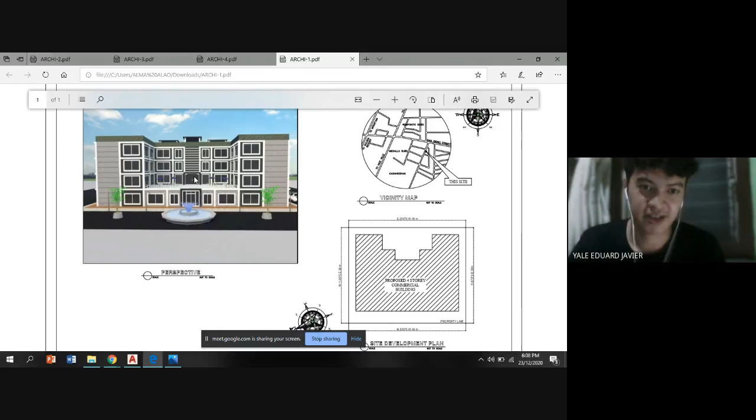This project is a four-story commercial building. First, this is our perspective, vicinity map, and site development plan. As you can see, it is a nice and big building because it has a 1,200 square meter floor area and a 1,780 square meter lot area.

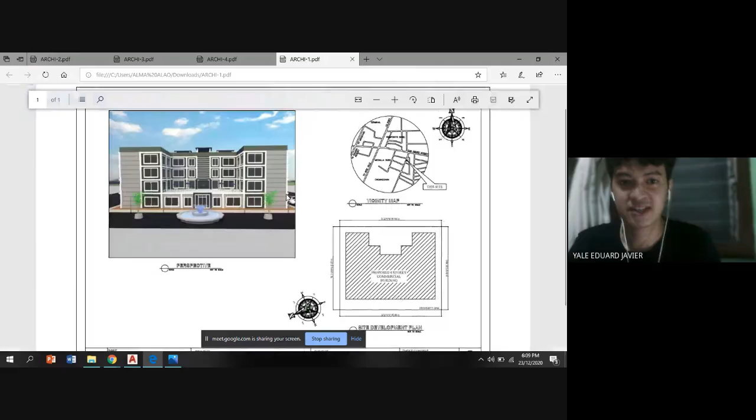This commercial building is located at Kangagohan, Hanabo City. As you can see in our lot area, we used an app like Google Map to locate our location. Using Google Map, we found an empty space, an area where we could establish a four-story commercial building.

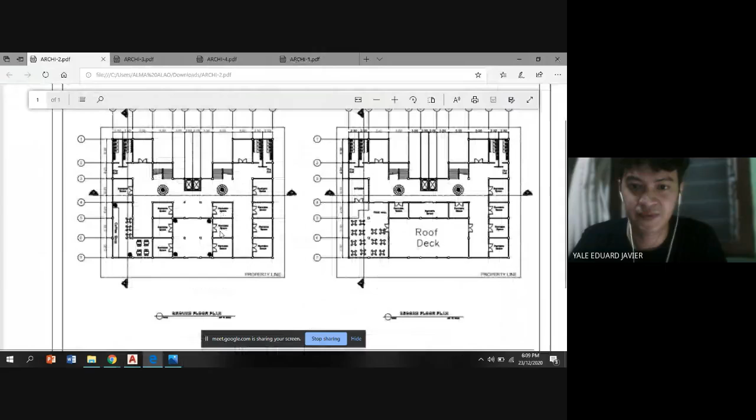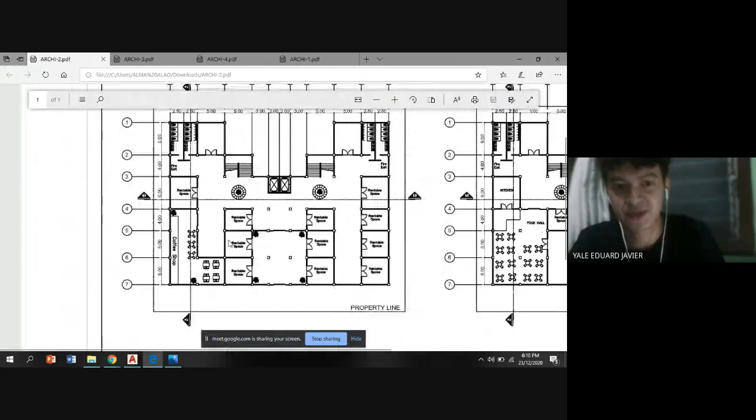Next I will show you our floor plan. These are the ground floor plan and second floor plan. As you can see in our ground floor plan, it consists of four bathrooms, four CRs, and two stairs at both corners and a fire exit. It has some rentable space, and also a coffee shop at the side for people to chill after work at the office.

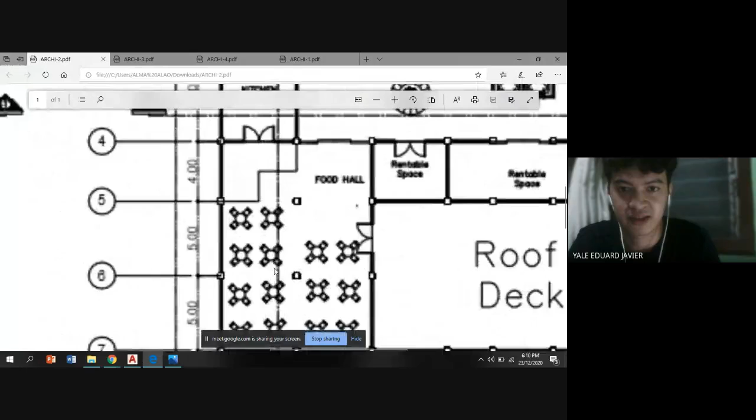Next, the second floor plan is also the same as the ground floor plan. The dimensions are also the same, but the difference is it has a roof deck on the second floor, and a food hall at the side.

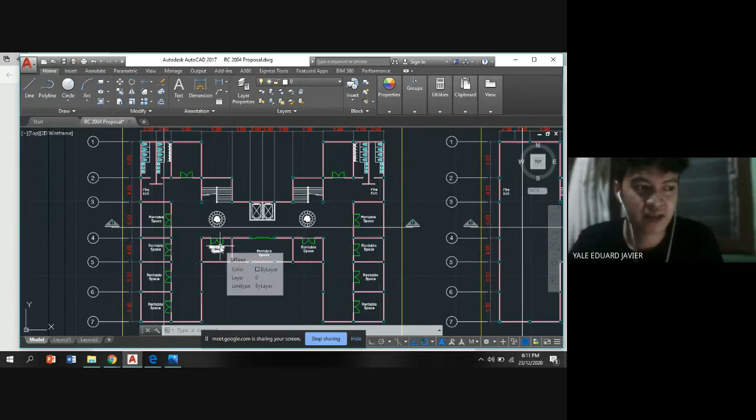Next, I will show you the third and fourth floor plan. This is our floor plan for the third and fourth floors. It is also the same as the second and first floor, with rentable space at the side and in the middle. It has an elevator, two stairs, and four CRs in the middle.

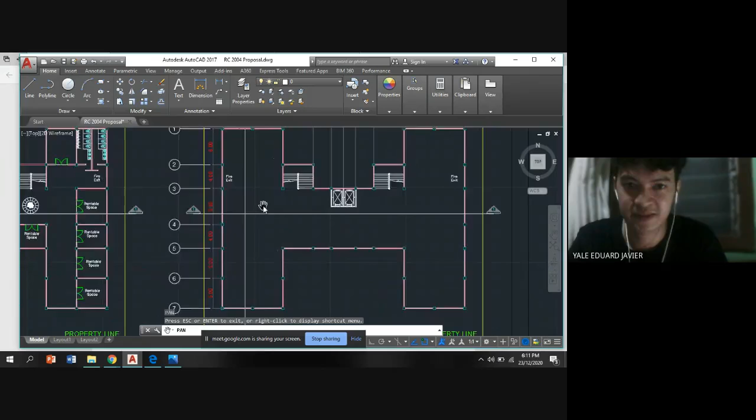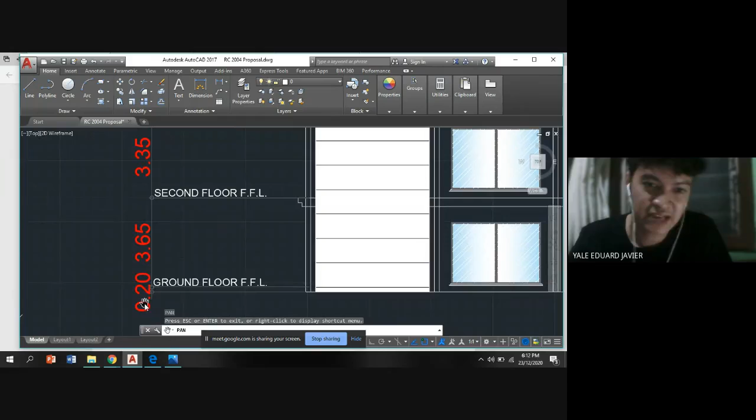Next, I will show you the elevations in our project. This is the front, left, rear, and right side elevation. In the front elevation, as you can see in the CAD model, the ground floor FFL is 0.20, which is the distance from the lowest point of the FTB.

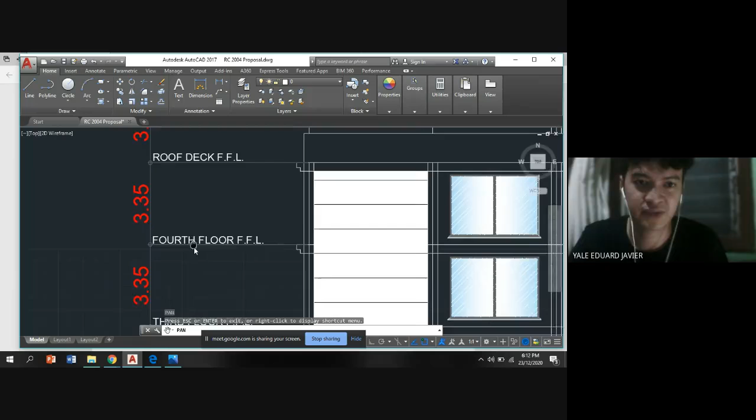The distance from ground floor FFL to second floor FFL is 3.65 meters. The second floor FFL to third FFL is 3.35 meters. Third floor to fourth floor is also 3.35. Fourth floor to roof deck is 3.35 as well. The roof deck to top of roof beam is 3 meters.

This is our left side elevation, which is also the same for all elevations. This is the rear elevation, and this is the right side elevation.

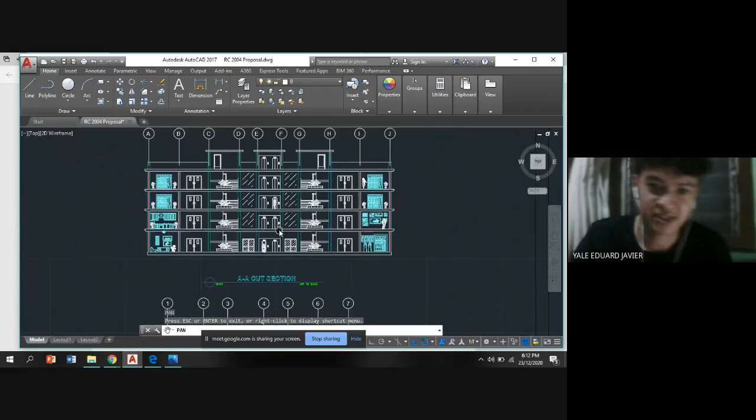Next, I'll show you the cut sections in our model. This is the AA cut section, and below is the BB cut section.

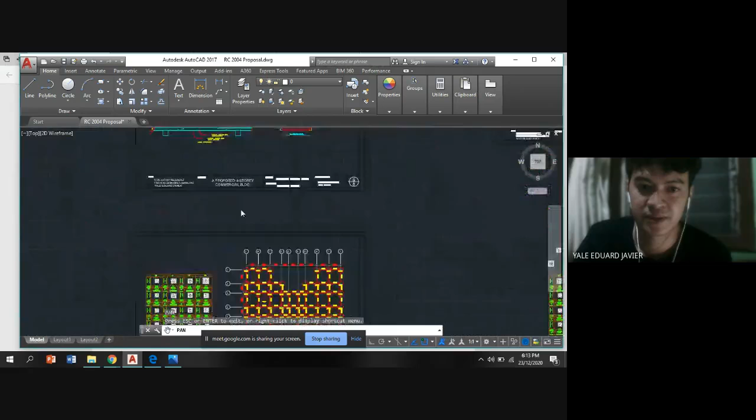Next, I will show you the framing plan of our project, starting with the ground floor. As you can see, this is one-way slab, one-way slab, two-way slab, two-way slab, one-way, two-way.

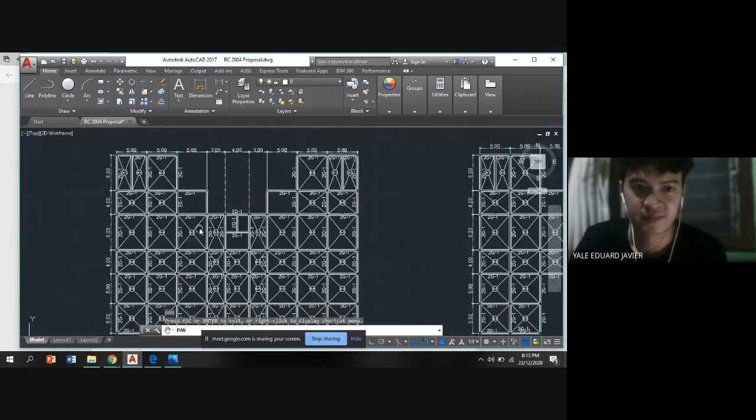This is the framing plan for the second floor, third floor, and fourth floor. This is the second floor laboratory area plan.

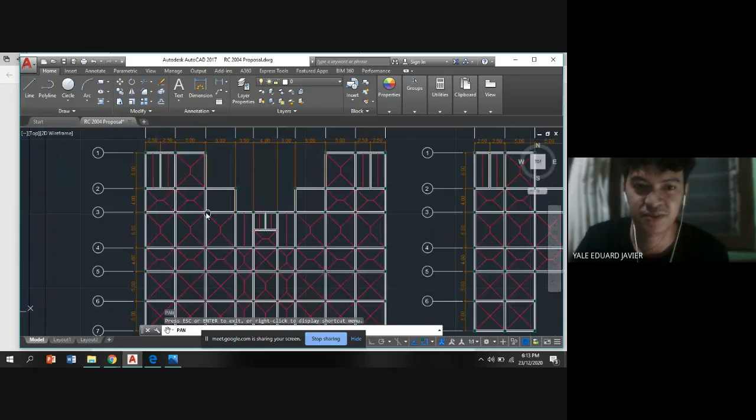Next, I will show you the schedule of beams. This is our schedule of beams for G1.

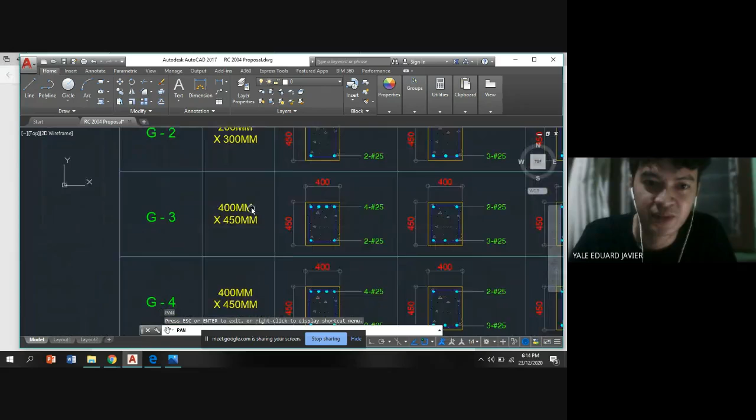It has a beam size of 200mm by 300mm. For G2, also 200 by 300. For G3, 400 by 450. G4 is also 400 by 450, at the height support and mid-span.

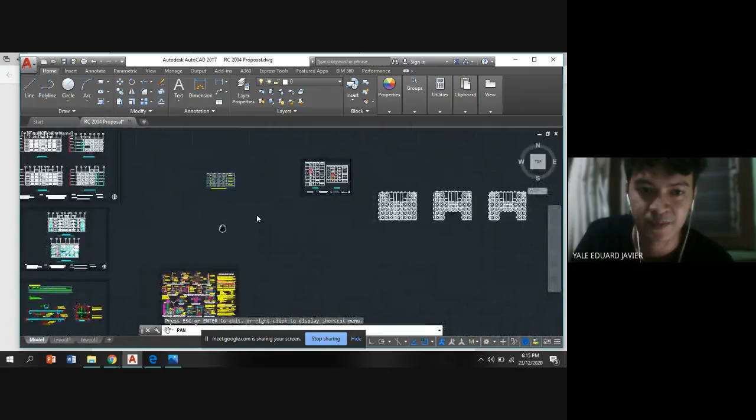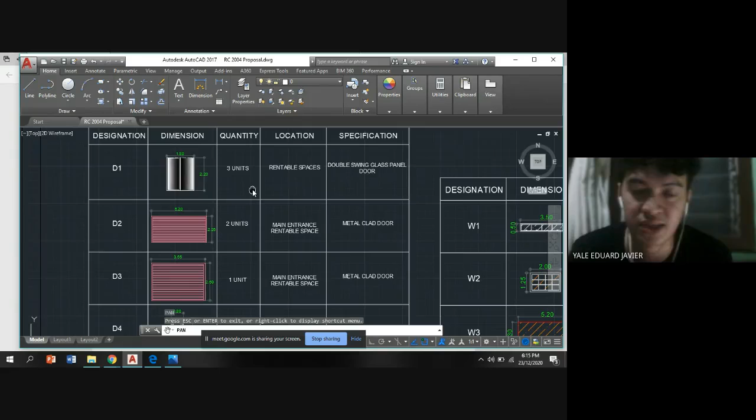Next, I present to you our schedule of doors and schedule of windows. D1 designation, dimension, quantity 3 units - these are the rentable spaces. We used D1, door 1, with dimension 1.80 by 2.20, quantity 3 units, double swing glass panel door.

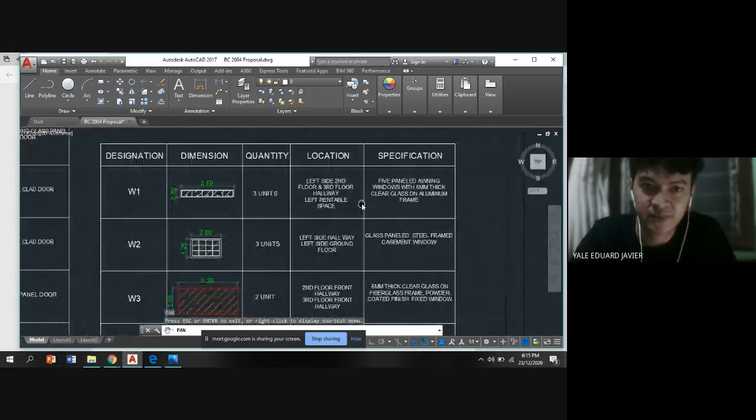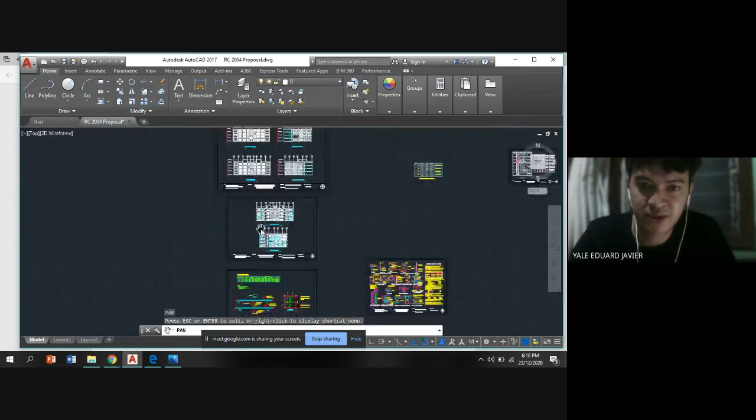Next, I will show you the slab detail. In our schedule of slabs and slab detail, it consists of 10mm diameter at 0.140 meter.

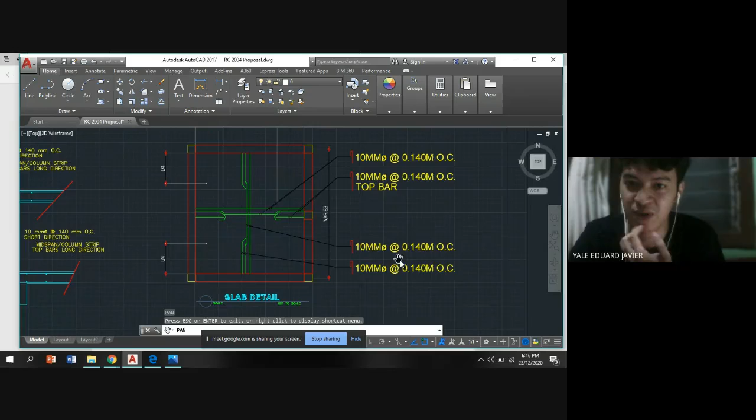You can see the top bar for the slab, and there's also the bottom, which is the same. For short and long direction, 10mm, you can see short direction, mid-span columns, strip top bars, long direction.

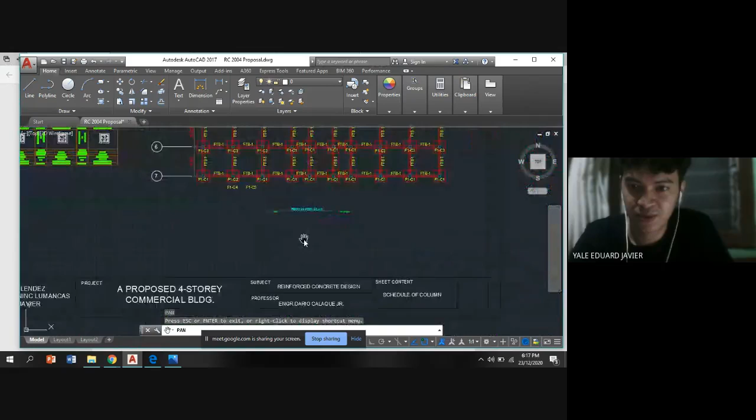For this story, next we have our column details, schedule of column, and foundation plan. This is column 1, foundation to second floor.

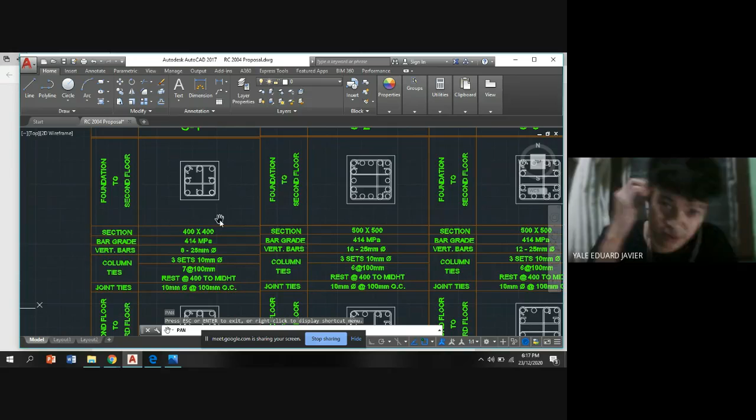The column used is 400 by 400 mm, bar grade 414 MPa. Vertical bars are 8 pieces of 25 mm diameter. Column ties are 3 sets, 10 mm diameter, spaced 7 at 100 mm, rest at 400 mm to mid height.

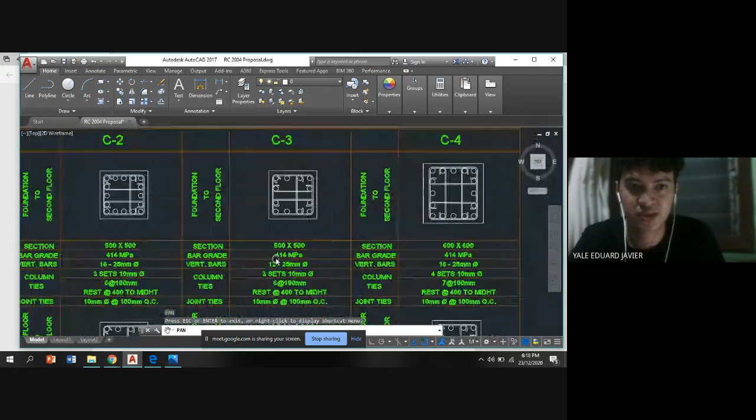Foundation to second floor, that's column 2. Column 2 is 500 by 500, 414 MPa. Next, column 3 is also 500 by 500, same as column 2. And column 4.

Next is the second floor to third floor column sections: 400 by 400, bar grade 414 MPa, vertical bars 8 pieces of 25 mm diameter, column ties 3 sets of 10 mm diameter, and joint ties.

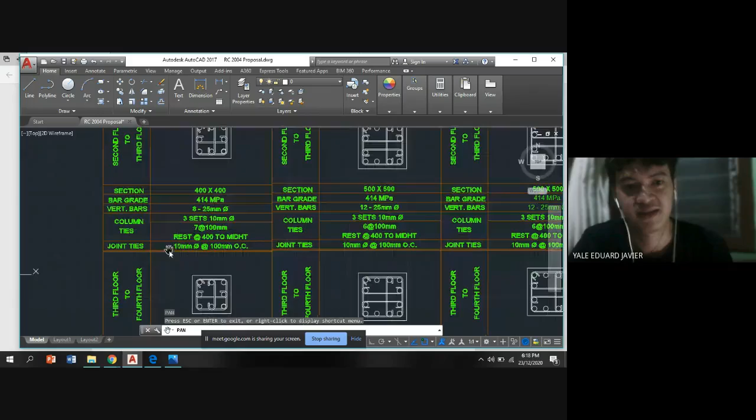Next, third floor to fourth floor, 400 by 400. Bar grade is 414 megapascal, vertical bars are 8 pieces of 25 mm diameter. Column ties are also the same, 3 sets, 10 mm diameter.

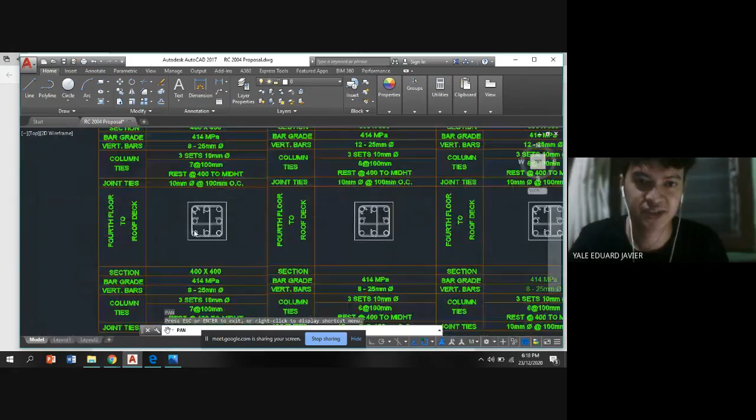Next and last is the fourth floor to roof deck column. Same as third floor and second floor, 400 by 400.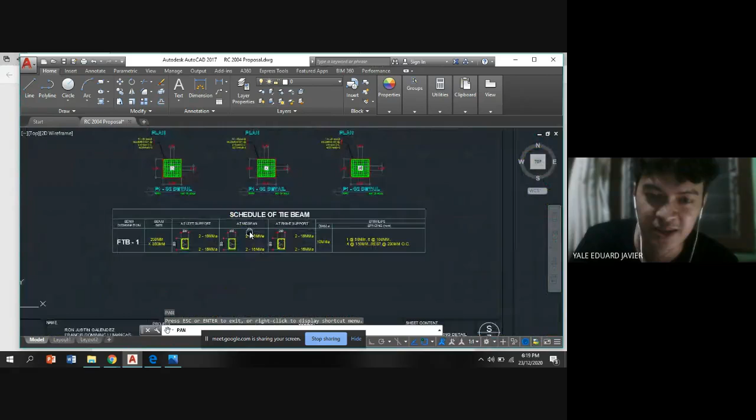Next, I will show you the schedule of our tie beams. This covers sheet content, typical footing detail, and schedule of tie beam.

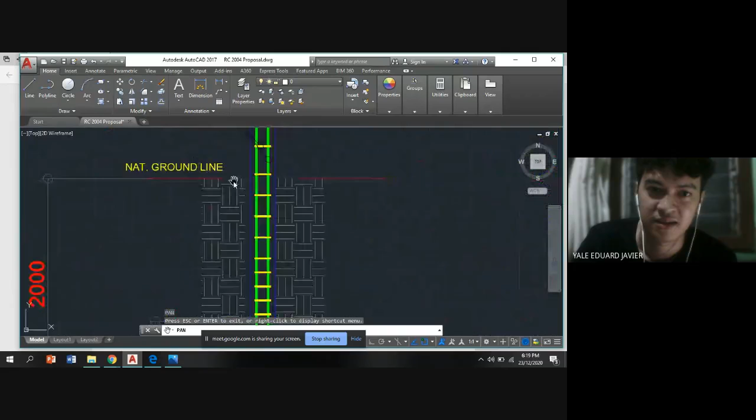Here, 8 pieces of 20 mm diameter vertical bars, with a 100 mm thick gravel base. 8 pieces of 20 mm diameter vertical bars with 10 mm diameter ties spaced 7 at 100, rest at 400 mm.

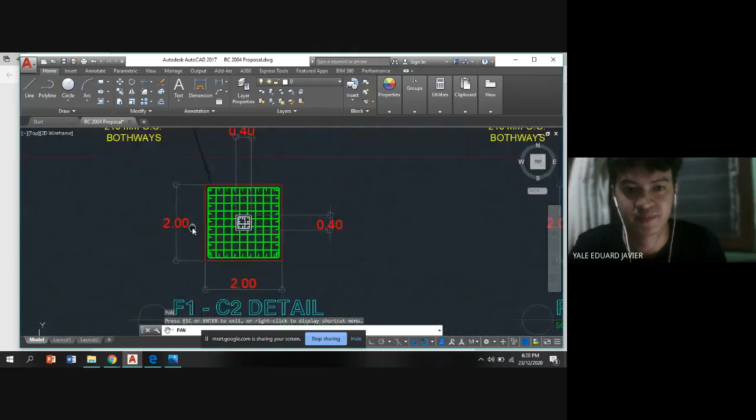It's the same. This is our tie beam F1C2. We used 10 pieces of 20 mm diameter bed bars, spaced at 210 mm both ways. The dimension is 400 by 400.

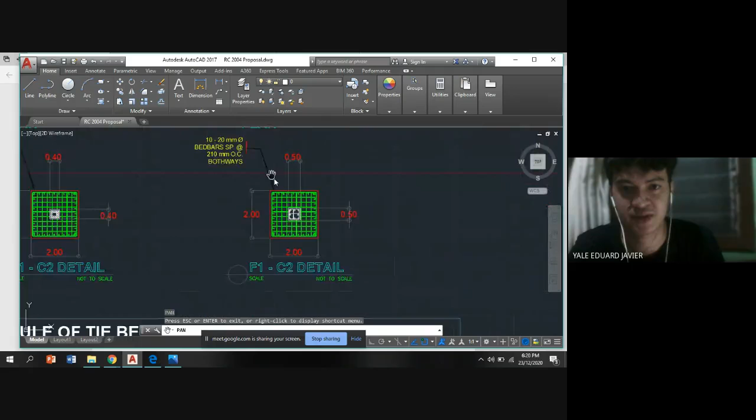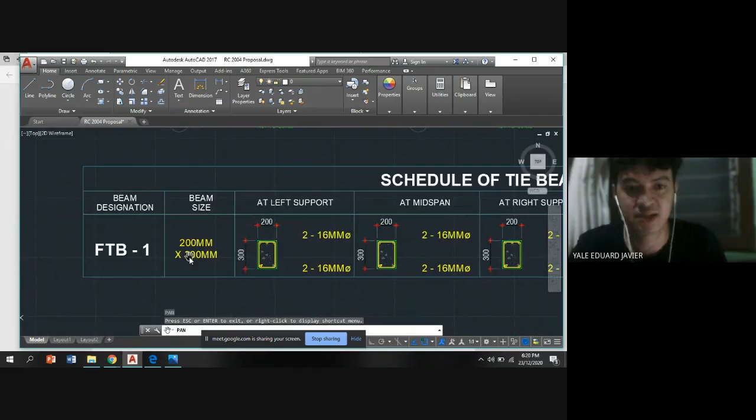This is the schedule of tie beams for the FTB-1 beam designation. Schedule of tie beams: beam size is 200 mm by 300 mm.

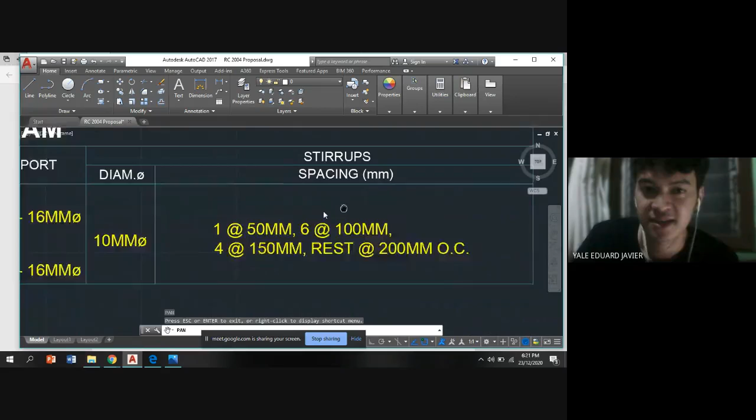At left support, we have 200 by 300 mm, with 2 pieces of 16 mm diameter and 2 pieces of 16 mm diameter, same at mid-span and right support. For stirrups, spacing is 1 at 50 mm, 6 at 100 mm, 4 at 150 mm, and rest at 200 mm.

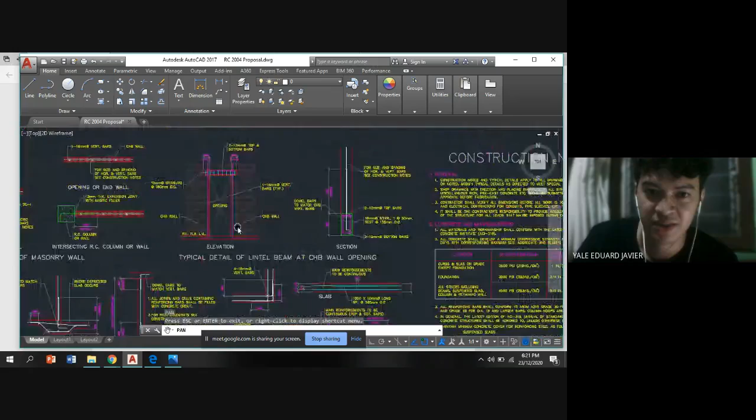Then lastly, I will show you our construction notes. This includes the typical connection detail of masonry wall, typical detail of lintel beam at CHB wall opening, and construction notes.

Typical connection detail of RC wall at corners, you can see 4 pieces of 16 mm diameter vertical bars. There's also a typical section of masonry partition reinforcements, and typical CHB footing details where applicable.

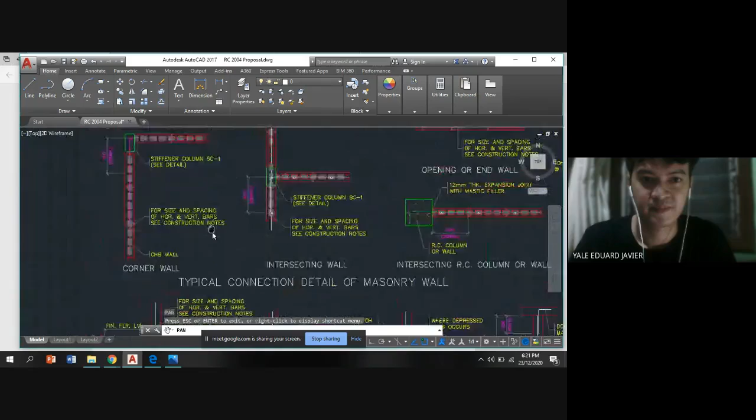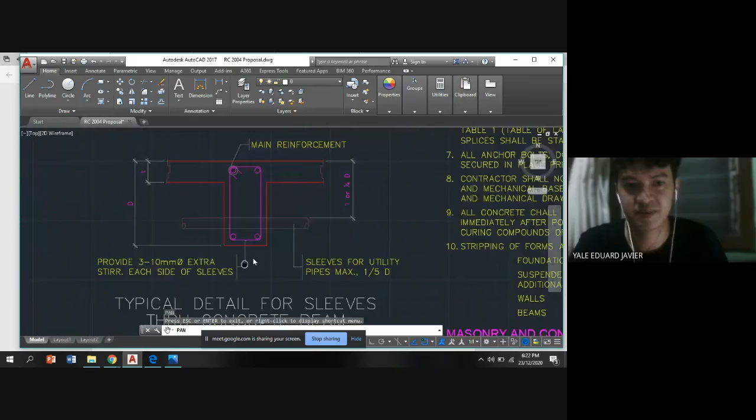This is the typical slab and beam construction joint detail, typical detail for sleeves through concrete beam, main reinforcement, sleeves for utility pipes, and typical detail for beam or slab change.

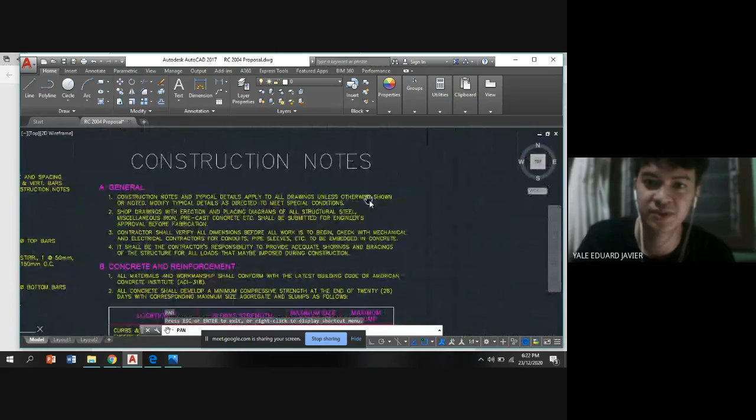So this is our construction notes. General construction notes and typical details apply to all drawings unless shown or noted otherwise. Modify typical details as directed to meet special conditions.

For concrete and reinforcement, all materials and workmanship shall conform with the latest building code or American Concrete Institute ACI 318.

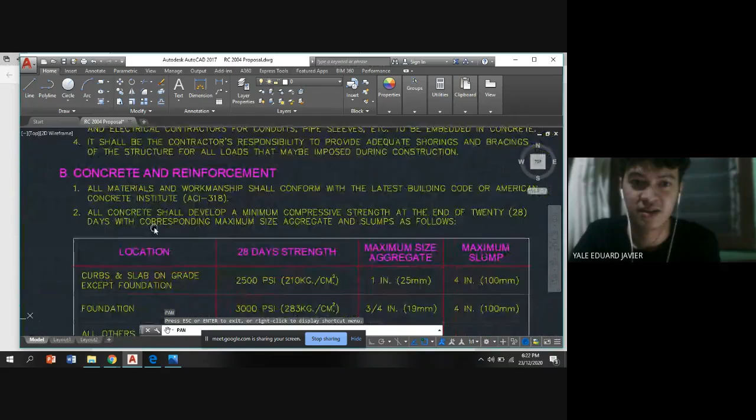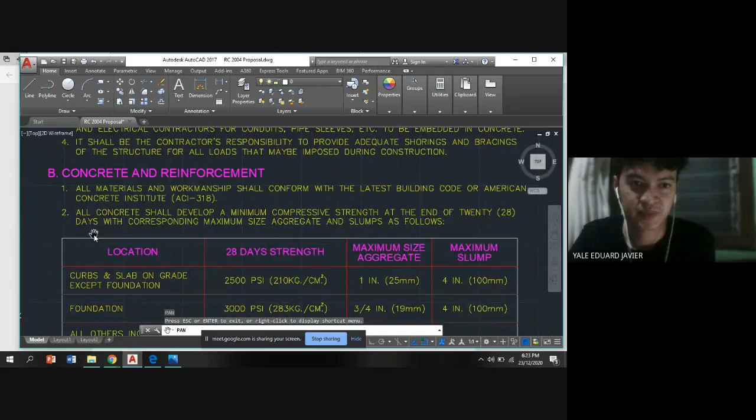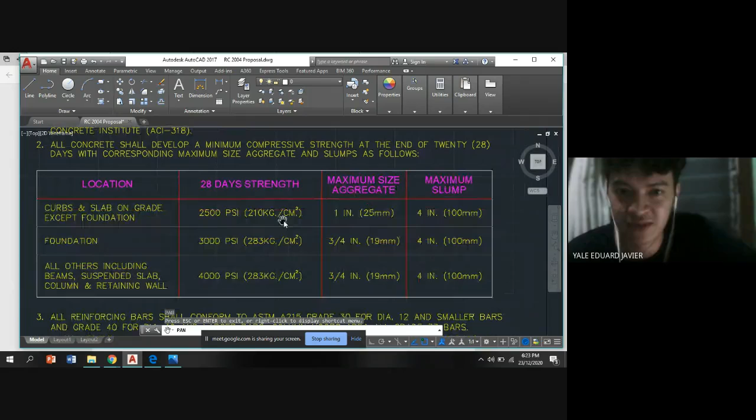All concrete shall develop a minimum compressive strength at the end of 28 days, with the minimum compressive strength and corresponding maximum size aggregate and slumps as follows: for foundation, curbs and slab on grade except foundation, at 28 days strength, 2,500 PSI or 210 kilogram per square centimeter.

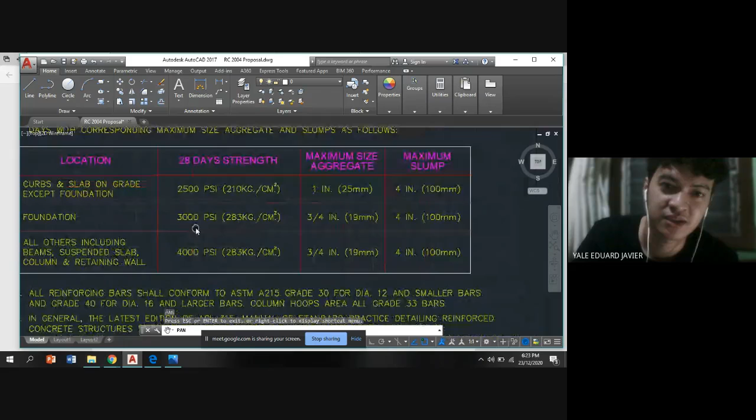Maximum size aggregate is 1 inch or 25 mm, maximum slump 4 inch or 100 mm. For the foundation, it's 3,000 PSI or 283 kilogram per square centimeter, with maximum size aggregate of 3/4 inch or 19 mm, and maximum slump 4 inch or 100 mm.

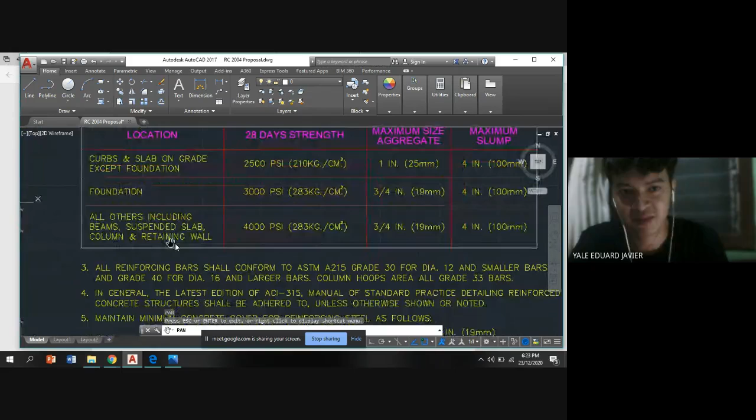All others, including beam, suspended slab, column, and retaining wall, at 28 days have a strength of 4,000 PSI.

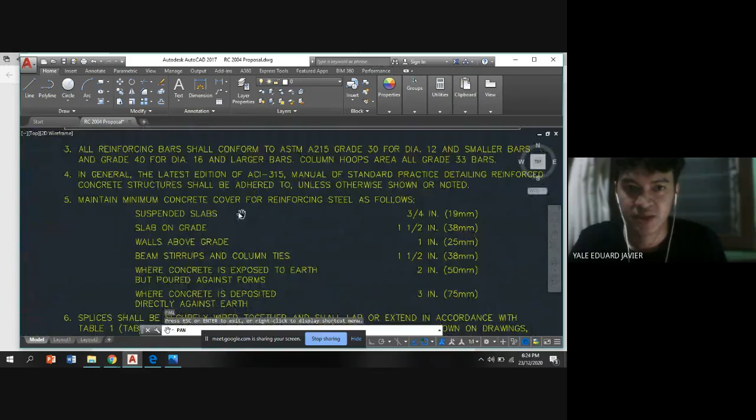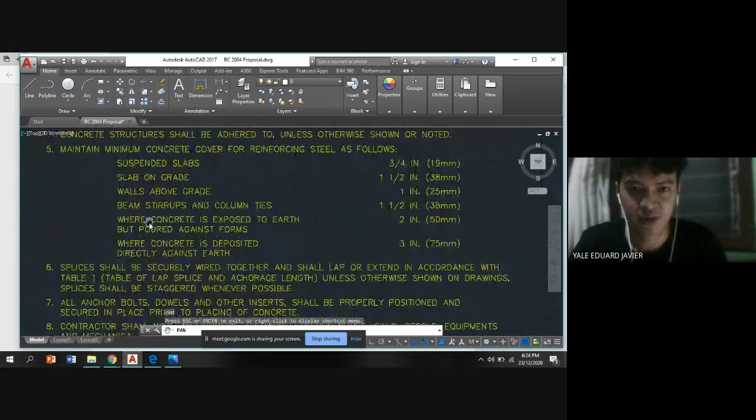Then, maintain minimum concrete cover for reinforcement steel as follows: suspended slabs, 3/4 inch or 19 mm; slab on grade, 1 1/2 inch; walls above grade, 1 inch; beam stirrups and column ties, 1 1/2 inch, where concrete is exposed to earth but poured against forms.

Stripping of forms ensures the foundation reaches at least 24 hours, while for suspended slab, except when additional loads are imposed, it's 8 days.

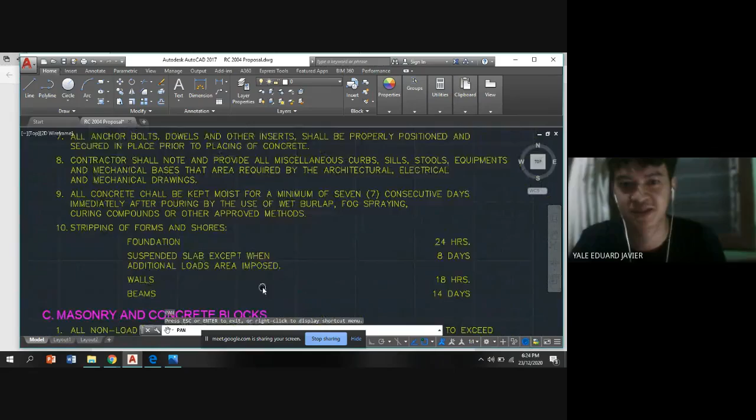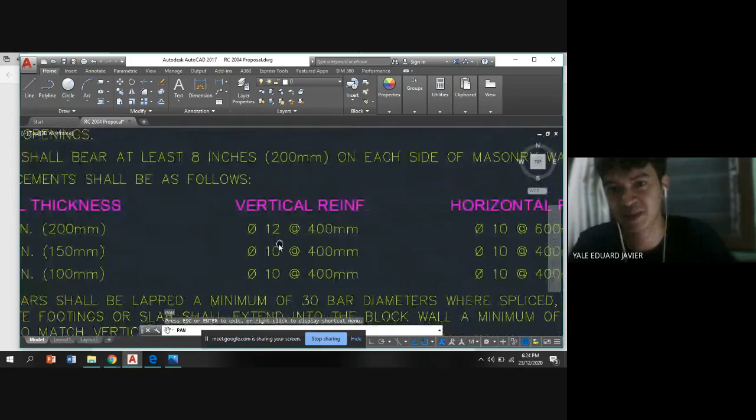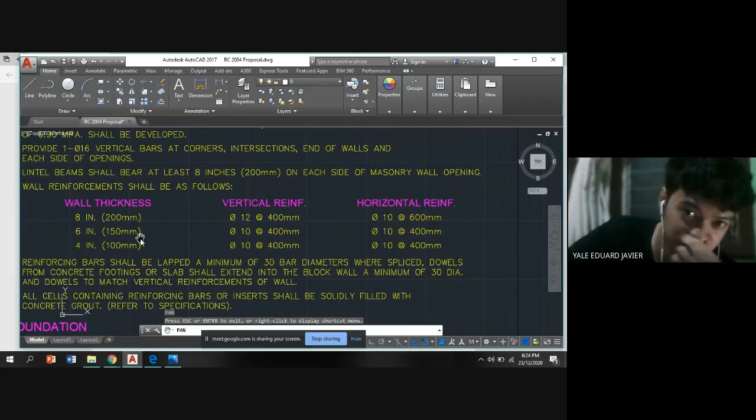For masonry wall thickness and reinforcement to follow: for 8 inch or 200 mm thickness, vertical reinforcement should be 12 mm at 400 mm, horizontal is 10 mm at 600 mm. For 6 inch or 150 mm wall thickness, vertical reinforcement is 10 mm at 400 mm, horizontal reinforcement is also 10 mm at 400 mm.